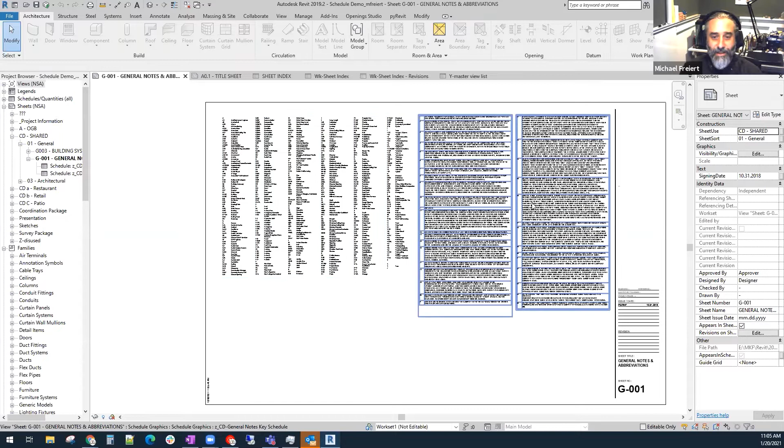There we go. The generic annotations, the notations that appear everywhere, and abbreviations lists. These are both schedules, and we both use them as sort of dummy data. Well, it's static data, but we're using a data set that is not useful to us. Nurse call devices don't really get scheduled a whole lot, so you can hide a lot of data in that set if you don't need nurse call devices.

Donnia, you use is it masses, right? Yes. Do you want to? Yeah, I can show. Do you want to jump into that? Okay. Yeah, let me jump in here and show you.

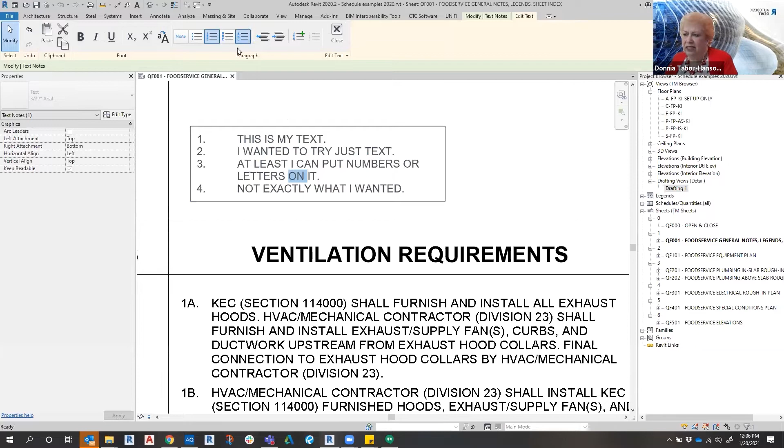This is a whole page of schedules. And why am I doing text? This is a whole page of schedules. And people say, well, you can do text with numbers now. Yeah, so this is my text. I just want to try it in text. At least I can put numbers or letters in, and yes, you can change it out to numbers or letters. I can't do combinations of numbers and letters though.

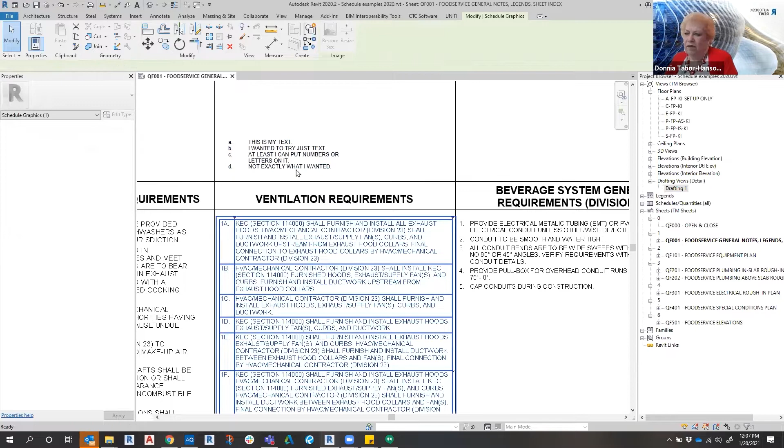So, yeah, I'm using a key schedule. And if I get into this, I can see that I've gone and said the fields are a key name. And just to show you what I've got, my schedules, these are always in a project, so I have these as project parameters. And yes, I'm scheduling masses.

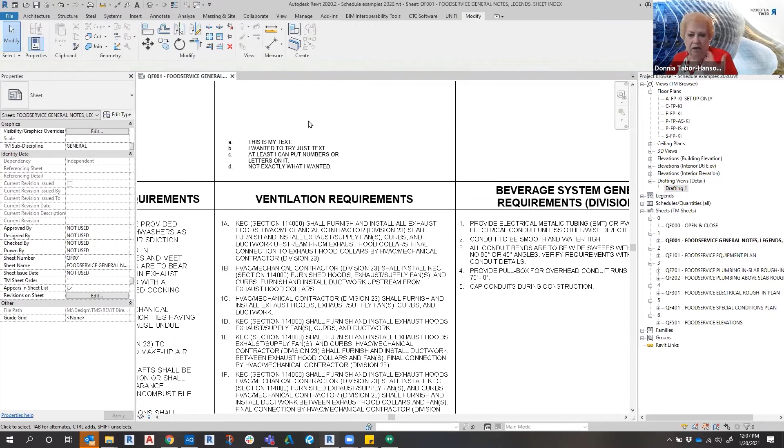It's something, a trick I used to do when, in a previous life, I used to go and set up architectural firms and engineering firms, and I did this for their notes. And then this one has been around since before I started. I was looking after talking with Michael, and I'm like, okay, so I need to see what this is. And I just looked at it and I'm like, well, it's scheduling topography.

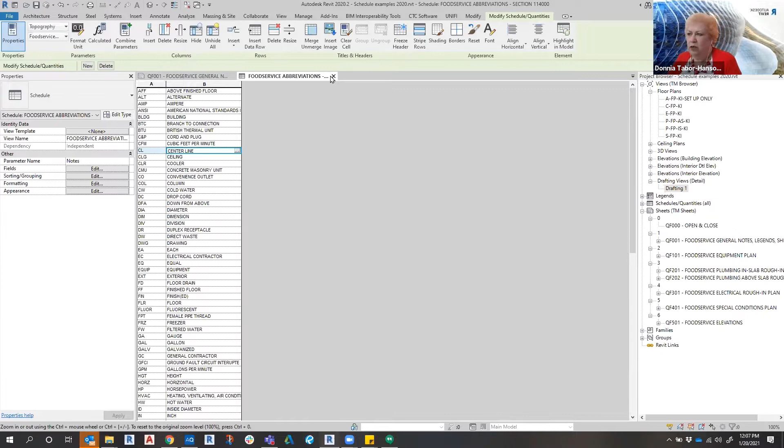Well, I don't use a lot of topography in a kitchen, so why not? So this is why we use these type of schedules instead of using notes and such, because you can break these up, move these around as you need to. And then we also have a nice little generic annotation with the title that we use for just sort of prettying up where our schedules are.

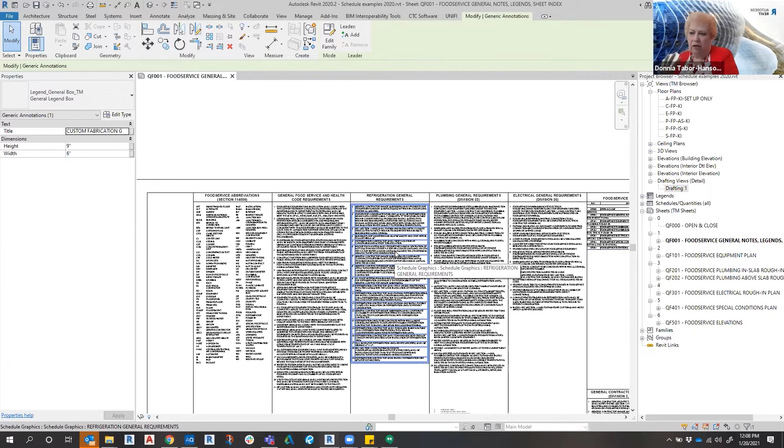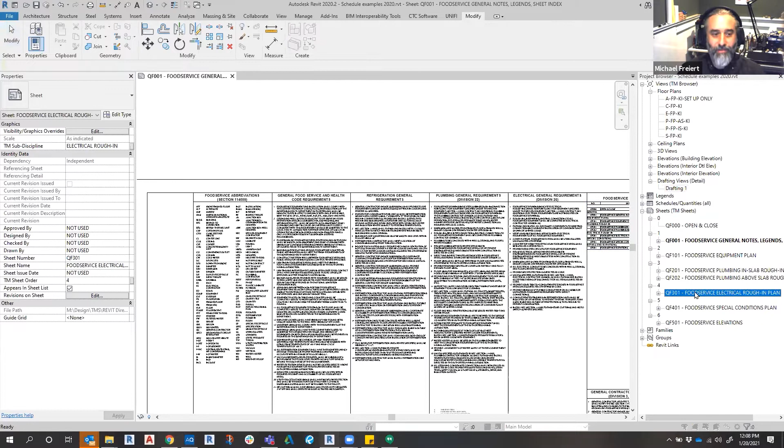So people say that you don't want the big title on there, it didn't look right - do your own title, do a generic annotation. So now these are fixed static things, yes, that once they're set up, they kind of sit there. You might have a couple of changes, once every 2 years you have to revise your abbreviations list. But those are just a vanilla schedule.

Both of us, for our more complicated schedules, have, let's say, print schedules and working schedules. Do you want to jump into your working equipment schedule for a minute? 'Cause that's got some cool stuff there.

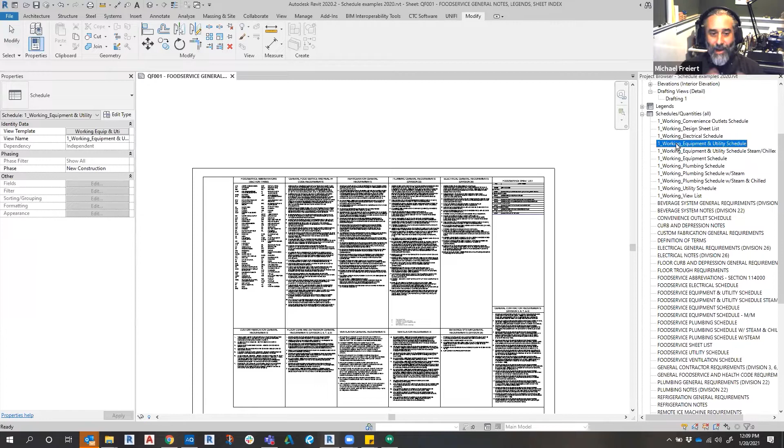Yeah, and go ahead. Your naming there, you use 1_working, whereas we use WK_. So your working schedule sorts to the beginning of your schedule views there, whereas ours sort to the end. It's a different way to organize them, but it means that instead of having all of the print schedules intermixed with food service, blah blah blah, working - if you put a key at the beginning of it or the end, you can sort by letter and pull all those schedules that are working out of the print schedules that you don't want your users to mess with.

Right. And in our working schedules, we have some things that are going to show up here for inclusion, like everything has to have this parameter turned on. And then we have our TM utilities, which is a parameter that we use to help color code, sort, and stuff. I'll be talking a little bit more about the color coding later, but it helps sort things in and out of schedules. This working equipment and utility schedule has everything in it, so anything that's in here feeds into other schedules.

It feeds into our electrical, our plumbing, our just our plain old utility schedule, or our equipment schedule. So they can go in here, and we like it up front because this is where we want you to go. First thing is right up here, go here, and it fixes all the others. And our print schedules are already on our sheet.

So we use these. I also do lowercase here, where if I go to the food service equipment and utility schedule, you see there's no lowercase in here and it's a lot cleaner look. So that's one of the things that we do with that.

So Michael, how do you sort what? As you say, we do the same thing. We have our working views in mixed case or camel case, and our print stuff in all caps. It's a really easy visual cue for the users. It's one thing to have a good naming convention that shuffles stuff around, but if you can have additional reminders to make it clear where the user is, it makes it easier for them. It takes a little bit of learning, but once they've picked that up, they just really run with it.

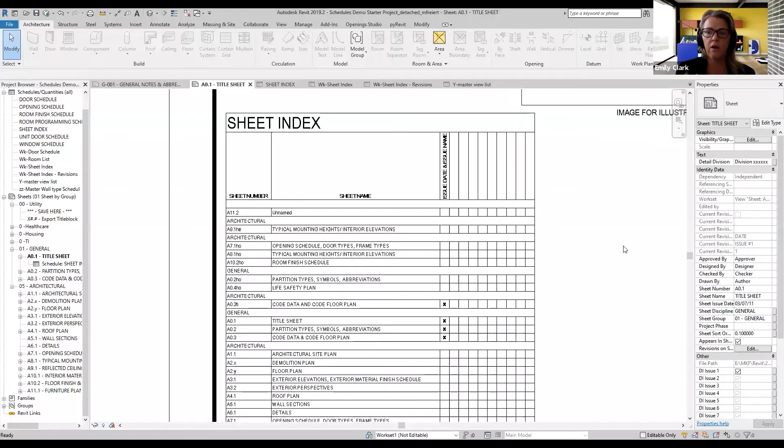So all of these schedules that you already have set up, including the ones that you showed on the cover sheet, those all exist in your standard template. So they're already ready to go for everyone. You're not pulling those from somewhere else. They're there in the template to start with.

So this is the cover sheet that exists in our template. You can see some generic notes there. They're instructions for the user to edit. This is our sheet index. It starts off on the sheet.

Jumping into it, we've got some placeholder sheets that are practice type specific variations. So the HO is for our housing team. They have some different scheduling stuff that they do, different from some of our other teams, related to code specific stuff for them. So that's why you're seeing sort of multiple architectural and general things in this.

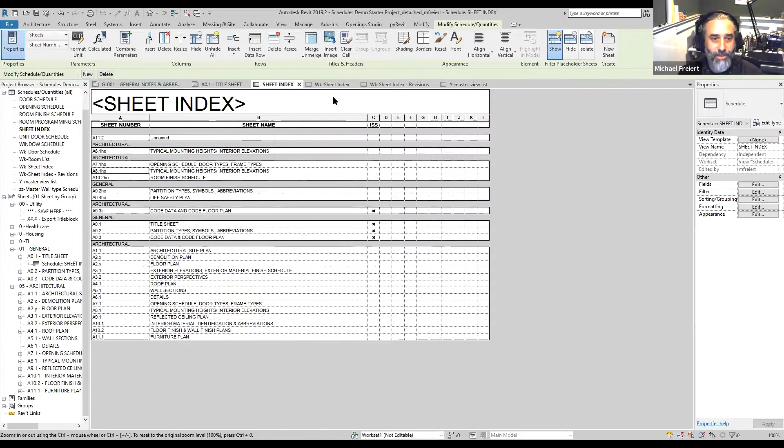But this is for print. There's a lot of hidden formatting that happens in here. Hidden fields, there's a whole passel of parameters in there. The working sheet index has, just like Donnia had, all of that exposed, so that if you need to edit something, you can find it.

Sheet index that's just for managing those little tick boxes of if the revision is included, a sheet is included in a particular issue and revision. So two working views: one that's everything, like this sheet isn't showing up, why not? I can see all the parameters that drive that. And another one that is just the, I need to turn these on so that when an issue is being released, the project manager can go through and be like, yep, all of these are here.

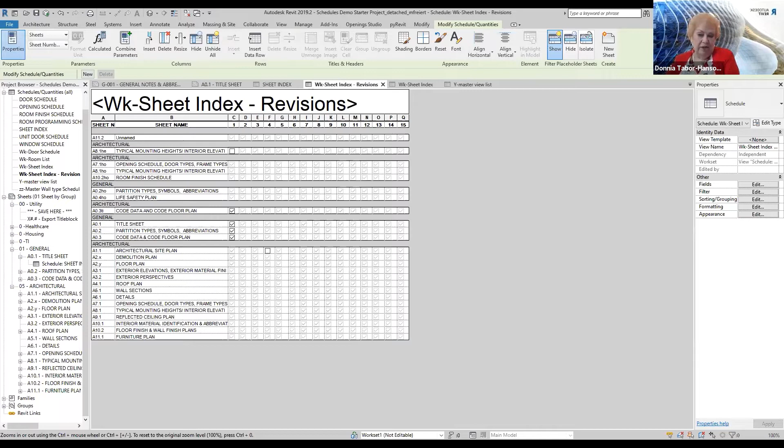So you have a lot of the same information in both your print and your working schedules. It's just in your print, a lot of it can be turned off, but still used for sorting and filtering.

Right. So let's get to the right schedule here. Our sheet group, if you look off on the side here in my browser organization: 01 general, 05 architectural, 03 is civil. It's going to sift in between there. We probably don't have a linked Revit model from civil, but we've probably got some sheets added in there.

So we're going to insert data rows for those dummy sheets. We can then modify the sheet group, which sorts into the bigger organizational sets, the general, the architectural. Architectural here is not the 01 - we've got a redundant sheet index discipline there. So the group sorts it into the big blocks, the discipline sorts it into the sub thing.

So we may want to group mechanical into, say, mechanical and plumbing and break it out. But then we may also have something strange happening. A common issue we have is a mechanical consultant will have, say, M100 be their general mechanical notes for all of their plumbing, fire protection, HVAC. All of those get stuck on one sheet. So M100 may go before M001 and M002, which may come after MP100.

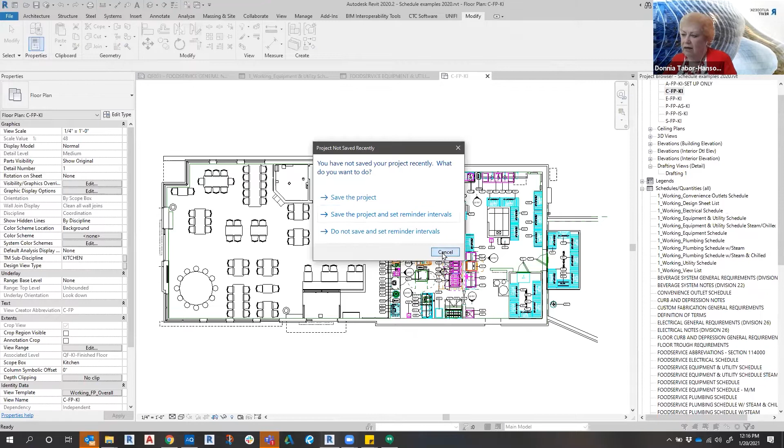Lots of colors here, lots of pretty colors, and all of our colors are based off of our TM utilities. So our TM utilities is a shared parameter used to help us sort things not only in our schedules, but also to make it so that our team members are set up for success. And here is a working view of one of our kitchens.

You see these colors in there. The pink is plumbing, the green is electrical, the cyan is no utilities, and if it's brown, it's got maybe plumbing and electrical, so that's a number 12 or 21. So we use these as 0 for nothing, 1 is plumbing, 2 is electrical, 3 is our HVAC mechanical, having to do with hoods mostly. So if it's got plumbing and electrical, we might have a 12 or 21.

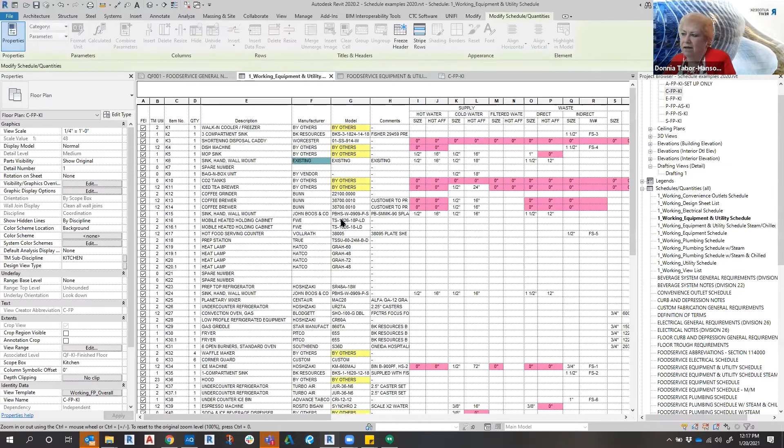And this color coding carries through to our sheets here. The yellow has to do with, is it by others? So you might want to just double check some of your utilities there. Existing, you might want to double check your utilities.

But when it comes to our families, if it's pink, there's something missing here or something red flagged. So do you really have a 0 in your direct waste size? Well, maybe it doesn't have direct waste. Maybe that parameter just needs to be pulled out of that family.

A lot of times when they build families, they'll start with a generic model family or specialty equipment family, and it'll have all these parameters in there. Well, they don't think about removing the ones they don't need, they just fill out the ones. Okay, I do the same thing, I fill out the ones I needed. I'm trying to start learning to take these out.

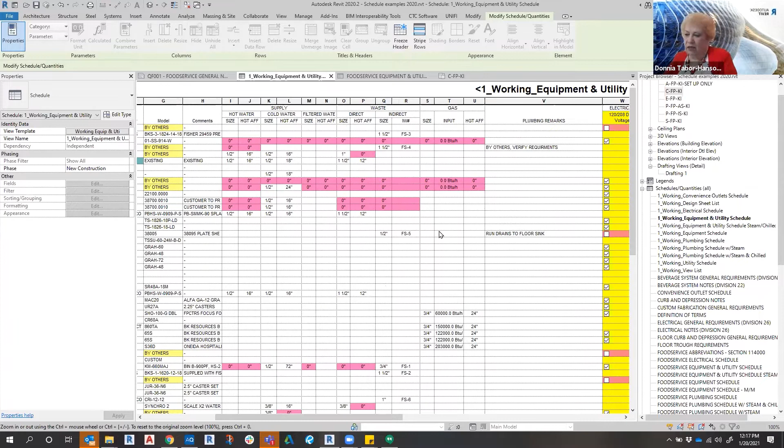But this also is good for down here. I know I've got an indirect waste size, but I don't have an indirect waste number. So this color coding is just a way of helping our team members check their schedules and their working schedules.

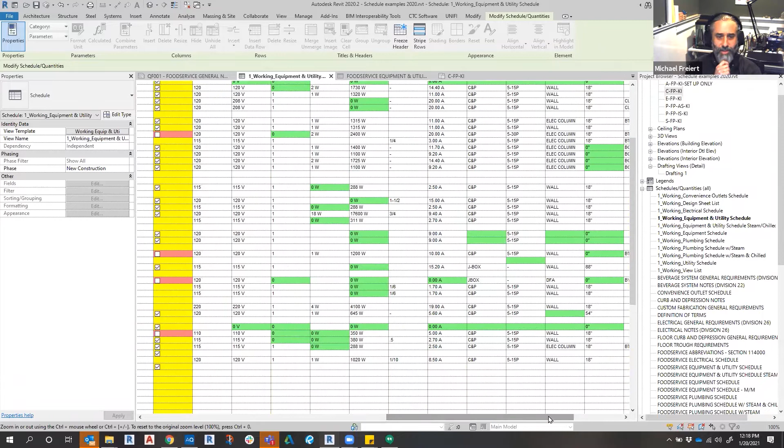And those are all conditional formats, right, Donnia? Yes, yes. So when I go in here and look at these schedules, I have actually started using some working view or view templates on my schedules so that I can set things back if I need to. And it was easy to take one from the other, because if I took the utility one, I could go in and delete all the plumbing and now I've got an electrical one, or go and delete the electrical and now I've got a plumbing one. So I just started using that recently.

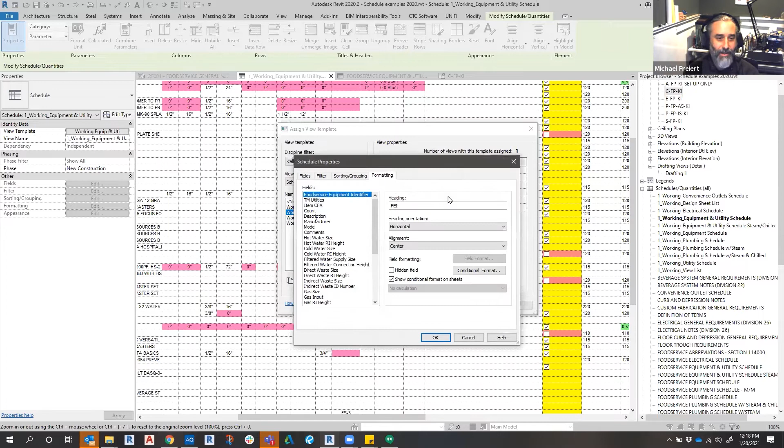So when I go into the formatting, if I go to see the indirect waste size, I have a conditional formatting that if indirect waste size equals 0, color it pink. So it's just a conditional formatting for those. And we're going to get to this a little bit later, but I want to point out that that's in the schedule for the parameter, and that'll matter in a little bit. That the conditional format to change the color is there.

Yes, and it is in my working views, not in working schedules, not in my print. So we just put the color in here, and it's just a way to help bring the team member's eye to, here's a problem here. Is this really supposed to be a 0?

Like, I found a CO2 tank that had all these parameters in it, and I'm like, it doesn't have utilities. So I just deleted all those, and guess what? It went all blank across through there. But it is just a way of checking up on things.

Let's see, I'm going back to my notes.

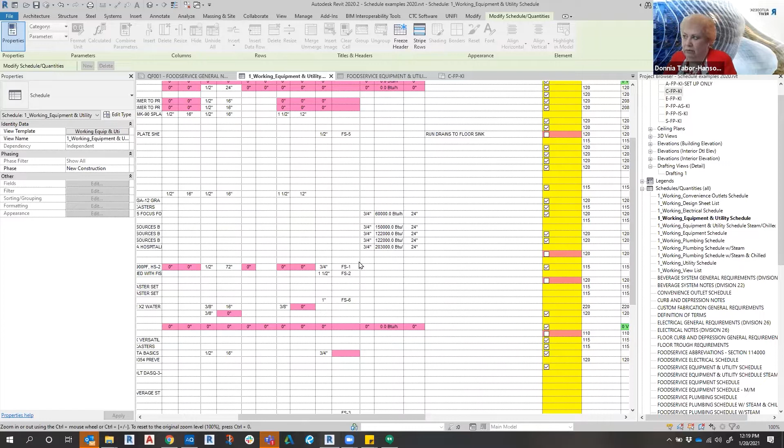The project parameters, we remove the 0s. So if I go to my food service, I don't want to see all these 0s, because that will give us an RFI real quick going, 'what do you mean you've got a 0 on your filtered water size?' 'Well, it doesn't have filtered water.' 'Well, then why do you have a 0 in there?' So that is moved in the fields.

This took some double-timing work, because here I have hot water size. If I go to formatting in here and find hot water size, it's a hidden field, because I'm using HW size. Now I'll go back over to the fields and find HW size, and HW, quit, cancel.

HW size, if I edit this parameter, you will see it's just got a formula to it. It says if hot water size equals 0, use empty length, else use hot water. That's what the formula is reading. So if hot water is a 0, use empty length.

Oh, where's empty length? You want to know? I hear that. Yes, way down here. I have several empty parameters. These empty parameters, I don't have a text one because I'm not working with text. I'm using length, and that works for the size of a hot water size. It also works for the height of the rough-in. So I can reuse that parameter over and over.

These parameters, when I edit it, you can see it's a project parameter. The project parameter is used here because I don't have to add it to my shared parameter file. I don't worry about that. It's in the project, and guess what? It's only used in schedules. Guess what? The schedules are in the project. So everything is maintained right inside there.

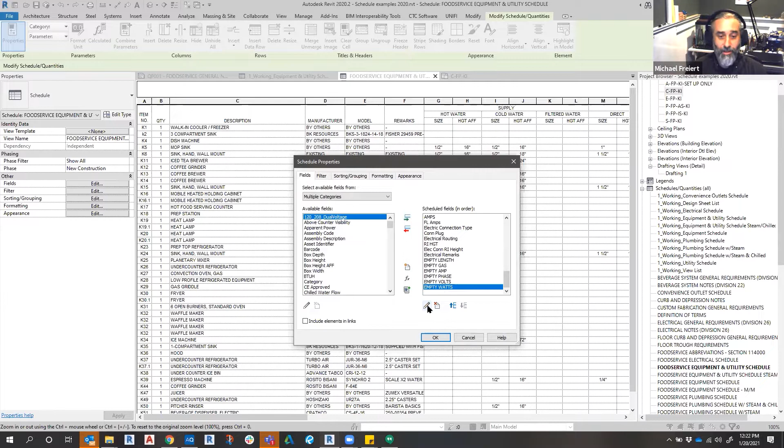You could have, if you need - yes, a light fixture that has an empty length for some reason or other, you could have that assigned to it, or a nurse call device or topography, or something in your door, as long as it's a length, as long as it's inches, feet and inches, yeah, you can use that.

When it came to something specialty like the electrical, I actually had to go see what it was - wattage, discipline is electrical, and the type of parameter was wattage. I had to go apples to apples with that. So I went into the ones that needed it for the watts, the volts, and the amps, and put those in there.

So let's go back to the fields and find wattage. I've got watts, and then I've got my WATTS in capital letters. Notice the capitalization - anything that's all capitals is something I've put in there. And I can see that this is: if watts equals 0, then empty watts, else watts times - because we're putting kilowatts apparently in here.

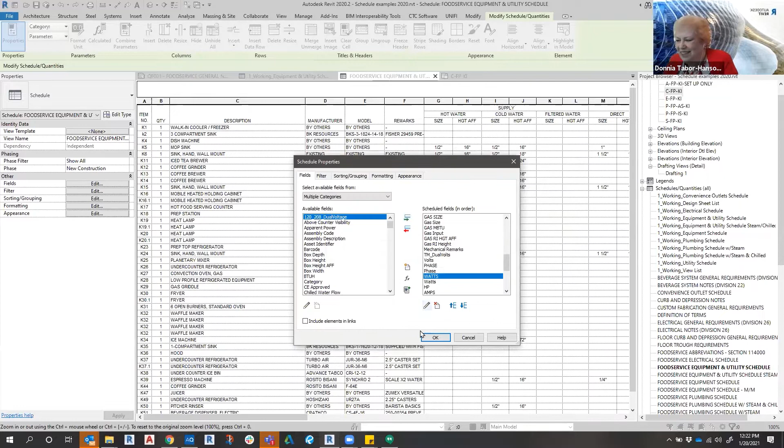Using those formulas and using those project parameters, I'm able to clean up this. This does look a lot neater than this right here. There's a lot going on here and a lot of things that we don't need.

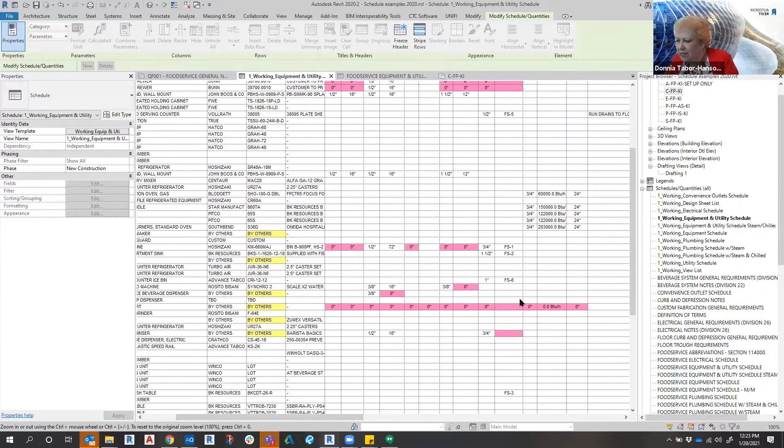As soon as I get - if this was FS3, let me get back into it. FS, well, let's just pick it on, there it is. See, the color goes away. As soon as it gets a correct value, it clears up the color.

That's how setting them up for success and giving them these colors so that they can work with it, so that it's a flashing thing. And it relates to the same colors that they're used to seeing in their print views. That makes it so they're used to it all together.

Then when they're ready to print, we have it just to go in here. And if I'm in FP overall, I go to FP overall and print, and just assign that print template to the project.

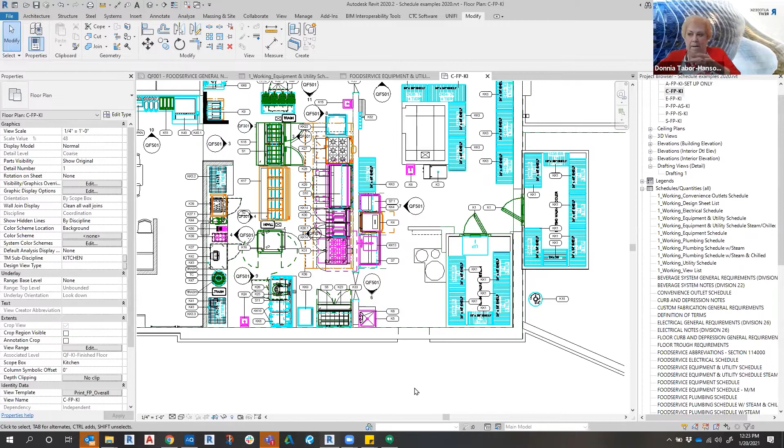So that's one way we're doing a lot of conditional statements and some formatting to work with our schedules. These things can be done in a lot of ways. You can red flag anything with a color, just put a conditional color statement in there for it. That's something I'm just introducing to our schedules.

I've got one person I've been working on the chain restaurant schedule with. She's really excited. For the others, if they want it and they see BIM managers come out with a new schedule, go delete the old one out of your project, start a new project with a new template, insert from file, and you can bring those schedules into your project. So everybody in my department can have all these color codings in any project they're working on currently. I've got it in 18, 19, 20.

That's the problem with BIM managers nowadays. You've got to keep up, because we don't get to choose which version of Revit. That's your job, Michael, the architects. We don't always get to choose right now. I've got a couple projects that are in the wrong version because they came with an existing file. We're the last ones invited to the dance, the kitchen. So we have to be prepared to deliver in whatever project version you have.

We've actually got a very similar use of the conditional project there, or yes, conditional parameters. Let's see here.

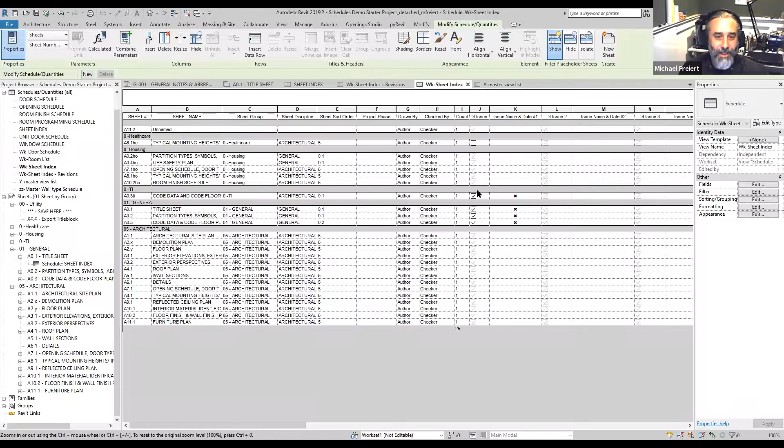I mentioned the tick boxes for this sheet issued with a sheet name, the issue name and number and date. There's a conditional format that comes from checking if this parameter is checked or is yes, it displays an X, a weird textual character, not an ASCII code but something like that. And if it's not checked, the parameter displays a space. So these are showing a null value effectively by a space, and they're showing an X.

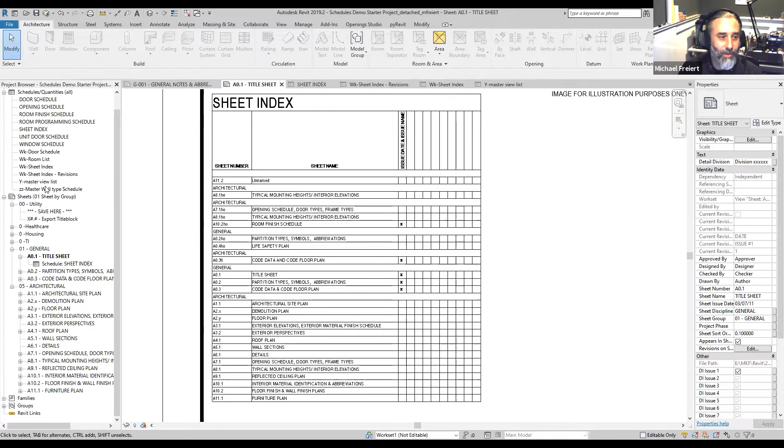So on the sheet index we're seeing those little tick marks, and we're not really running with them. We use a little bit of conditional formatting for color in our master view list. This is when you're looking for a view and trying to figure out if everything's there. Sheet number shows up as green. If it's not on a sheet, it doesn't show up. It's a way to really clearly highlight that there's something missing there.

Now, something I'm interested in digging into more, based on your use of conditional formatting and the way we both use a dummy parameter to drive data cleanup and make it show up the way we want, is shared parameters, which we use a lot more aggressively than you do. Hijack shared parameters to schedule something interesting that you don't necessarily expect to need to schedule. Do you want to talk about that a little bit?

This is a really cool idea that I'm starting to torment our BIM team with. You are? Okay, you'll have to stop sharing for me to share. Yep. We practice this on Teams, and on Teams you can just steal sharing from each other, but on Zoom in presenter mode you have to actually give it up.

Okay, my hijack parameters. This all started when I was working. There was another BIM manager in charge of the Trimark shared parameters, and I was working with a client that had a lot of unique requirements for schedules. I was told, you don't touch the shared parameter from Trimark, and that's still hopefully the rule today. So I told her one time, how about if you give me some I can hijack? Just some parameters. She says, what do you need? Well, I need some text parameters and some length parameters. And I gave her a list.

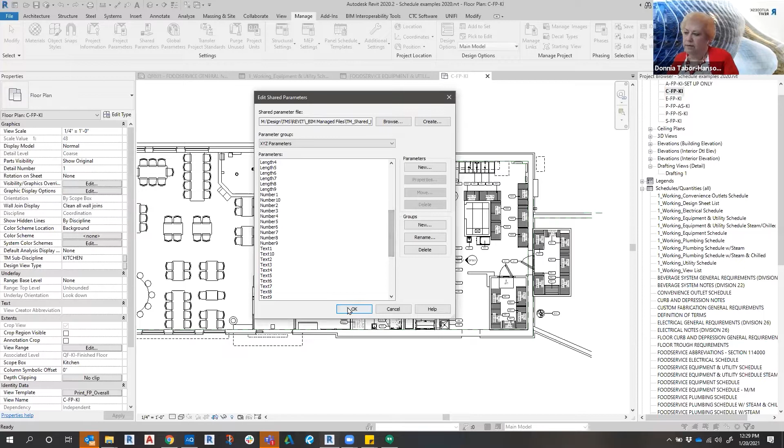Now, you want to really mess with somebody's mind, don't tell them what it is. So what you're doing is taking other data and linking it to that shared parameter, and then displaying it in a different format with a different thing. All I had to do is give it a different header, a different title in the formatting, but it allowed me to use those.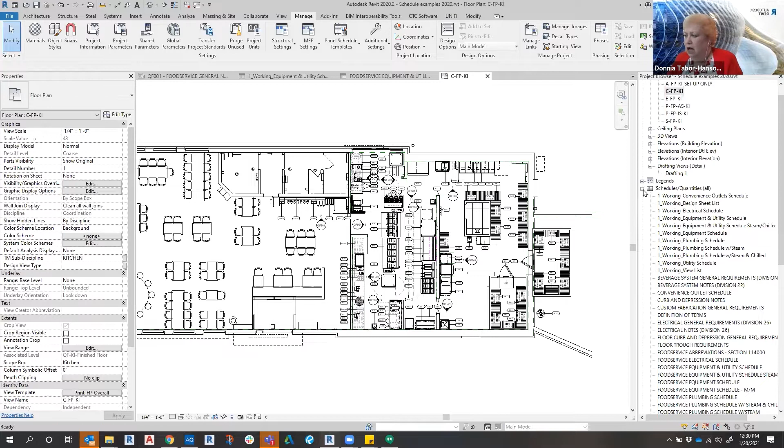And the worst thing you do is don't tell everybody what you're doing. So, never document anything you do that is different from standards. If you're doing something different from standards, always hide it, name it exactly the same thing, don't rename anything. I'm kidding. Please, if you change something, if you change normal behavior, write it down, because you will forget, even if it's just you, when you look at the project 3 months from now.

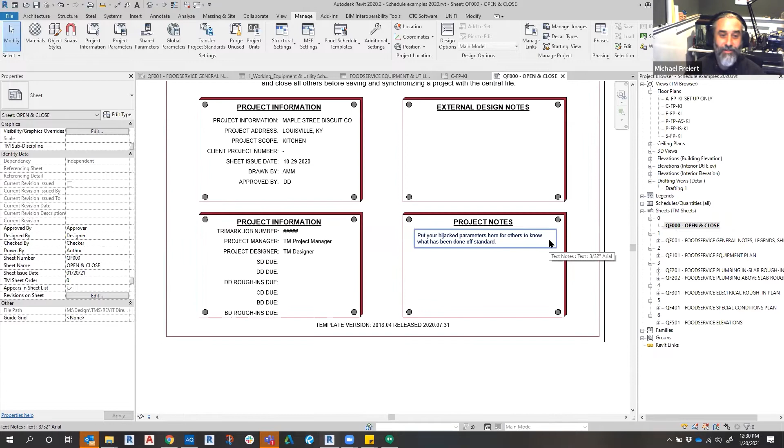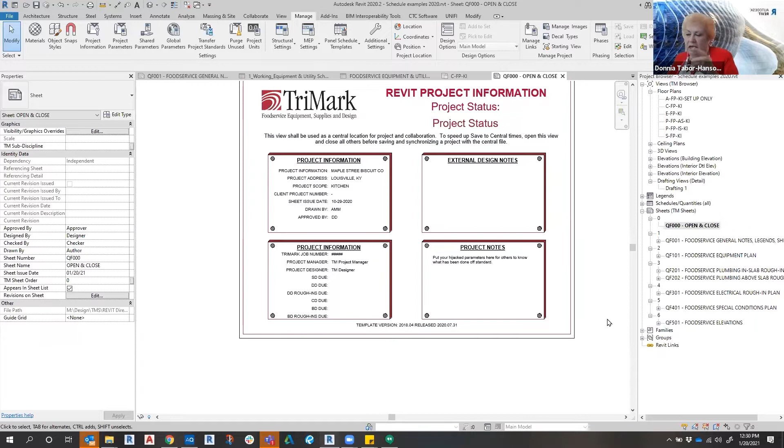In the case where I was working with a large team, we actually had a OneNote with a whole list of where all the hijacked parameters were. Right now, when I'm working on something, like for this chain restaurant that I'm putting on, there's going to be some things that are unique, not only maybe hijack parameters, but also other things like make sure that you check this and that, or get this information for the project notes.

We have a place on our landing page, this is what our open and close page is, it is a title block, and this is where we put our project notes. So you would put your project hijack parameters here, so that others know what has been done that's not standardized.

So yeah, you do want to document if you do these hijack parameters. It's kind of like this: as a BIM manager, I know that I can give you a shared parameter file and somebody's going to break it. It's like I've invited you into the sandbox, you're going to break my toys. Some people will throw the sand out and then invite the cats in. It's just, if you give them the toys they can play with, they're more apt to not break it and not try to create their own.

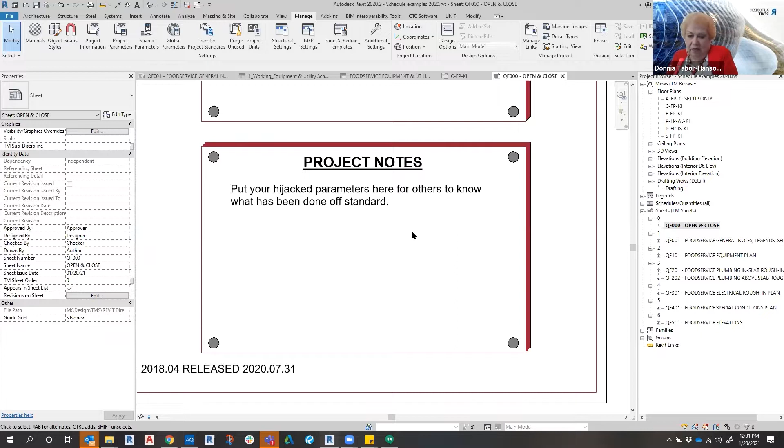They need some of their own. I understand, well, here's something to play with. And those toys need to be accessible and easy enough for them to understand. So naming the shared parameters something that is useful, as opposed to just...

I recently came across a line type that was such and such a line type, and I'm like, I know who that's named for, I know the person. I'm sure they didn't do it themselves, I'm sure they said, hey, I need this line type, and some user is like, okay fine, I'm putting in their line type. But if you're going to give people those tools, which you need to, give them tools that are easy to use.

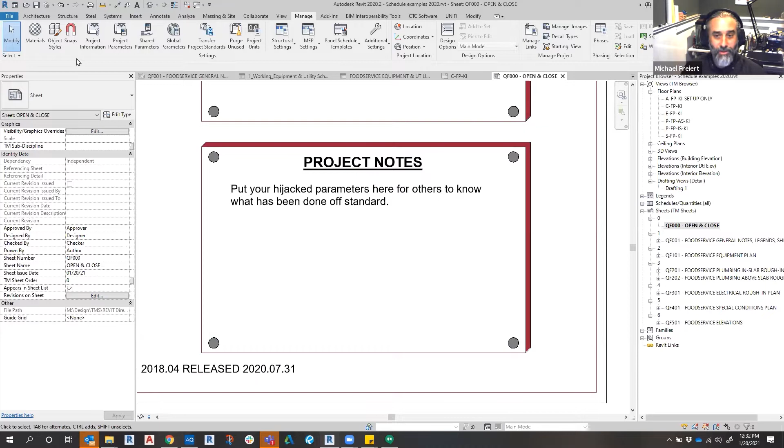So the working views that we're demoing are all set up so that they work well for what the users are doing. Like what I, as a BIM manager, want to be the ideal behavior may not be what actually works well for the boots on the ground. So give them the tools that work well for them, and room to grow in those tools.

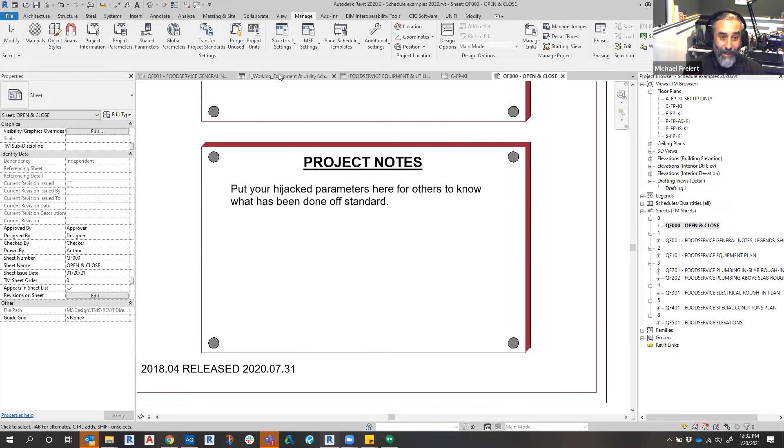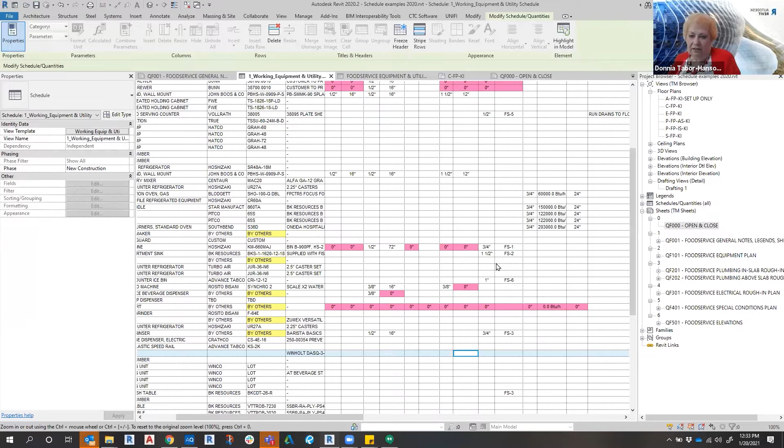Right now I don't have any of those hijack parameters being used in the current things. Now the group that I have been working with for that larger chain, as far as I know, they're still using some of those hijack parameters, but I know others that have used them, and I just know it's there if they need it. Give them the tools, they're going to be smart enough to go get a shared parameter.

You know, give them the ones that they need. Well, and you can use those to potentially combine multiple parameters.

So if you've got 2 or 3 different parameters looking at different things, and you don't want to edit the families and rework those parameters, you can have a conditional statement, like: fix parameter C, if parameter A exists, use parameter A's value. If parameter A doesn't exist, use parameter B's value. If parameter A and B don't exist, return some error code and highlight it in red, so you can see what's happening. As long as they're the same flavor of parameter, you can get things dialed in.

And even if they're close, you can do something like multiplying an integer by 1 inch to get to a length, if you have to.

Yeah, let's see, we've gotten a little bit off our script here.

You had mentioned using view templates for views. Yes, and switching a little bit between different types of working parameters, or working schedules there. We really only use view templating in schedules for resetting things to desired print behavior.

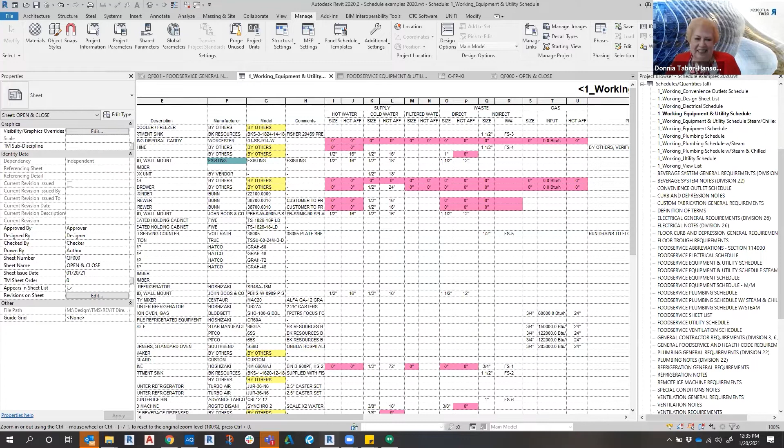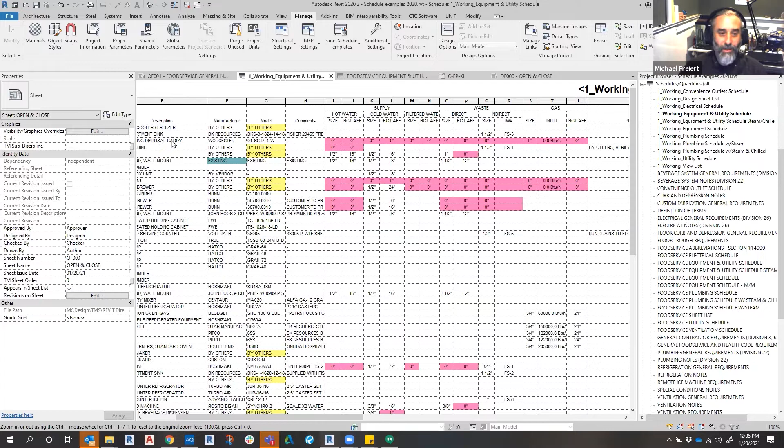Everybody has this, where someone copies something from a previous project. It worked well there, so they copy it over. But that project was based off a project started 5 years ago when we used such and such a font, and all those little display things are just a little bit different. Maybe it's a 5/64 font size instead of an 1/8 inch or whatever. So you just reapply the working view or the print view base schedule template, and you can get there.

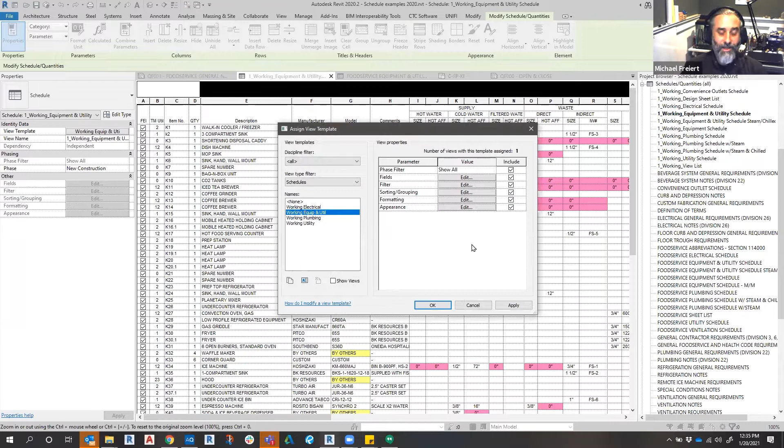And you can decide what you want to include. If you don't want to include all the formatting... actually, never mind, you should always include all the formatting. Yeah, you should. Let's just not do that.

One of the nice things about this is if you fill it out in here, you can go to view templates, manage view templates, and see these things show up. So I can use transfer project standards to get my view templates from one project to another. I don't have to bring the schedule over, I can just bring the view template over, and apply it as needed.

So if I go back and try this idea, I need that formatting for the print ones because I hadn't thought about doing this before. I just started using it because here's all the things that were in there, it had all the categories and everything formatted the way I needed it to be. I just duplicated it and made, remove plumbing, added electrical and stuff. So I like the idea of having it lock down all your formatting, your lines, your types of font, and everything with it.

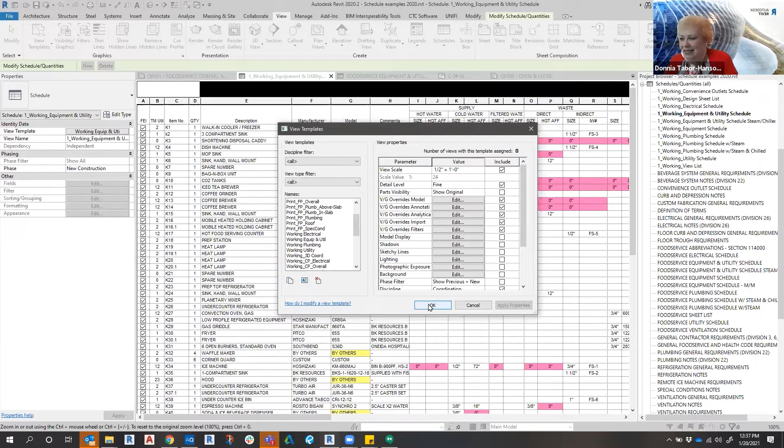And that would be so easy to bring over, because you can just do that with transfer project standards. Nice, yeah. And worst case, if you've only got part of it that's messed up and part that's regular, with the template you can apply just the little bit of it you want. I believe that works with view templates too.

Oh no, come back, do you need me to stop sharing? No, it's fine. So let's see, where are we at here? Speaking of view templates, if you do want to stop sharing for a second here, let me get back to Zoom and share screen, Revit share.

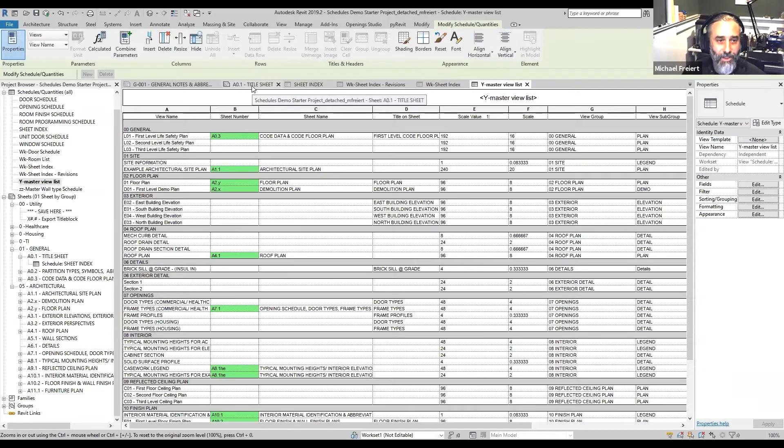So if you've got one schedule, that's great, we all know hopefully that you can split a schedule up into multiple columns, which is how these general notes work. There's a whole passel of different columns there.

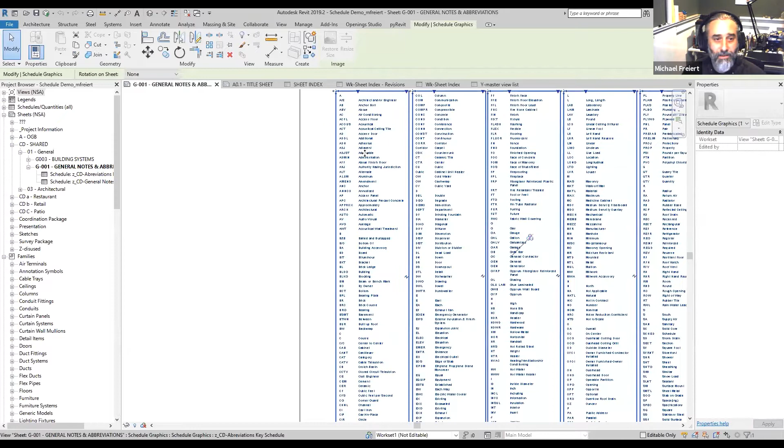And these are using a similar hidden field formatting. Abbreviation letter there is a hidden field, so the sort process sorts the A's out and they're called A, and that's what the group is. So if I make that hidden, the sorting and grouping is using abbreviation letter as a header.

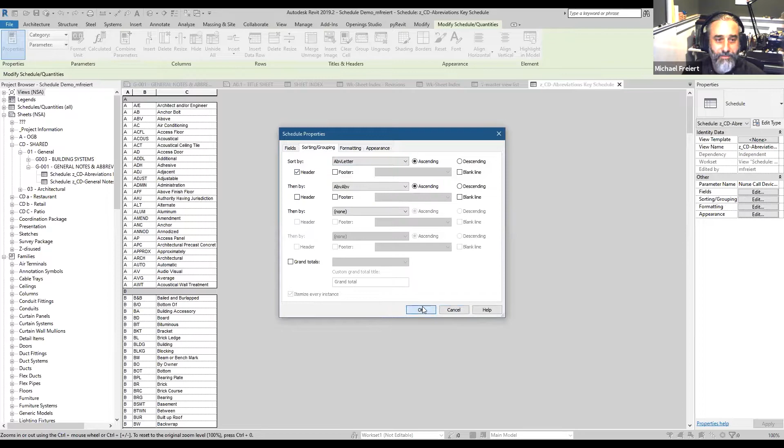On our title, though, let's say you've got a really big project. It's not at all unusual for us to have a really large project that has more sheets than will fit on one page. The way to fight that is to take your sheet index, or whatever schedule you have, and duplicate it.

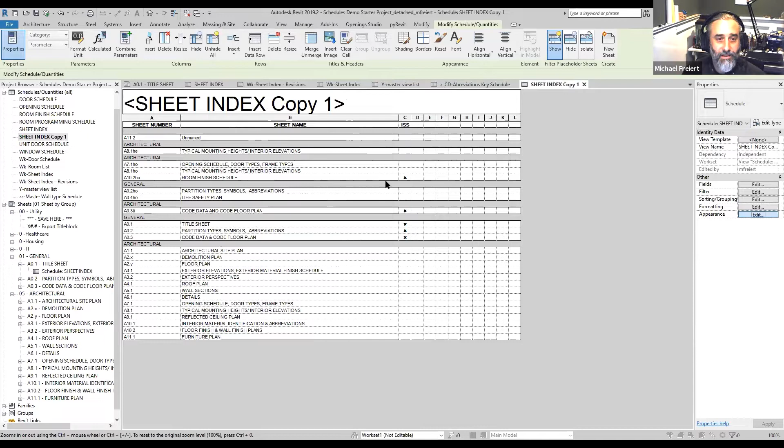In our working sheet index, we don't need to change anything, we can just run where it is, keep going. But in our sheet index copy 1, we're going to turn off the title because we don't necessarily need it on the second page, we don't want to see that.

In this view, we may want to filter it by greater than, and then for schedule A, and for page 2, we may want to filter it, for schedule A, we want to filter by less than some value. So this would be where our sheet sort order comes in.

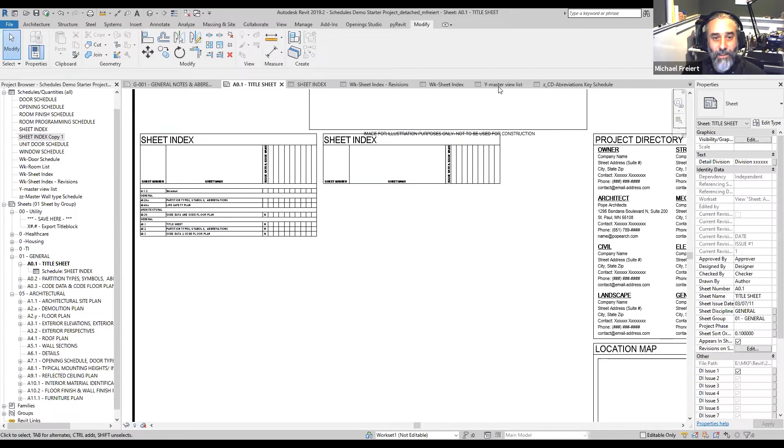We don't want parameter exists, we want to say is less than, I'm just going to pick 5 here. And that's going to lose all of our architectural numbered sheets in our, it's going to be called copy. We're still seeing all of them.

So over here, we want to filter by sheet sort order is greater than or equal to 5. That way, anything that is 5 is included in one side or the other. So if it's less than 5, it goes into the first sheet. If it's more than 5, it goes in the other.

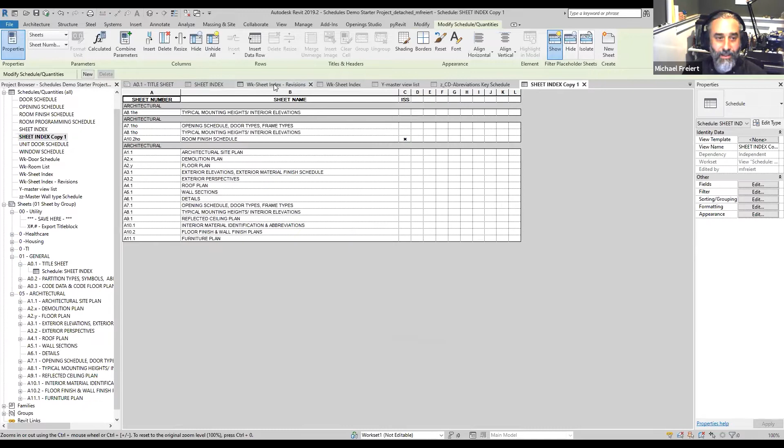The reason we've got that, no, not the revision 1, the working sheet index, the reason we've got that as a number rather than an integer is if we need to add, this wants to be 4.9, or this one needs to be 5.1 to move it to the end. Then when we have a 5.2, we can add 5.12, 5.13. We can add a little tiny bit of random number there.

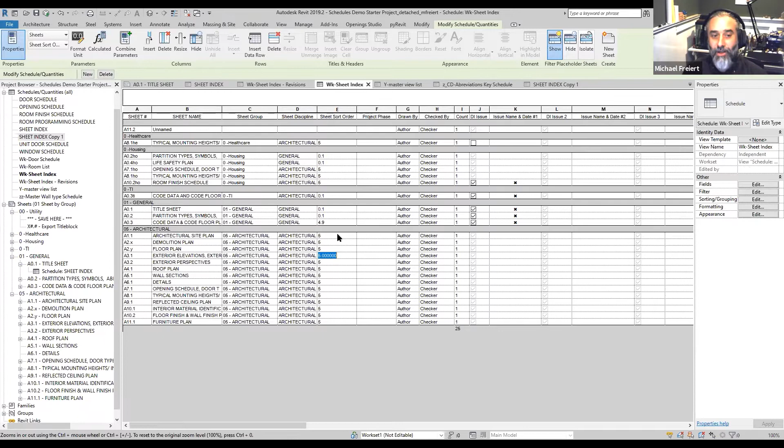It doesn't show up anywhere other than in the sort order schedule to get it to show up in the right order. If that was an integer and I needed to renumber this to 3 and then added 2 more sheets to 4 and 5, well, now I'm in my 5s and that doesn't work. So I find it's very rare that you want a hidden parameter to be an integer as opposed to a number, because a number can always be a whole number.

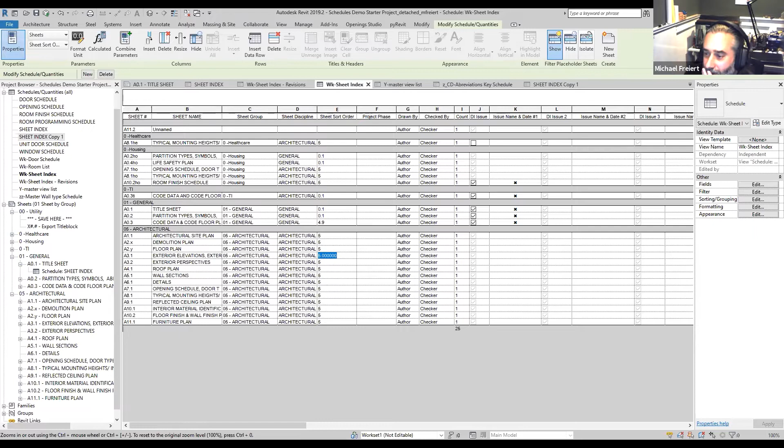But it's rare that it needs to get a little bit more tidy. Let's see. Okay, I've got something to show there. Let me go back to mine. Yep.

When it comes to those, that's when my TM utilities helps. So I've been in the overall working equipment and utility, but when I go to my electrical schedule, so every one of the, go ahead. I was going to say, to talking about your TM utilities thing,

These are another hidden parameter. Donnia is using them for the 0123 as a code for electrical, plumbing, etc. Yes, and they could be ABC, MEP. Yes.

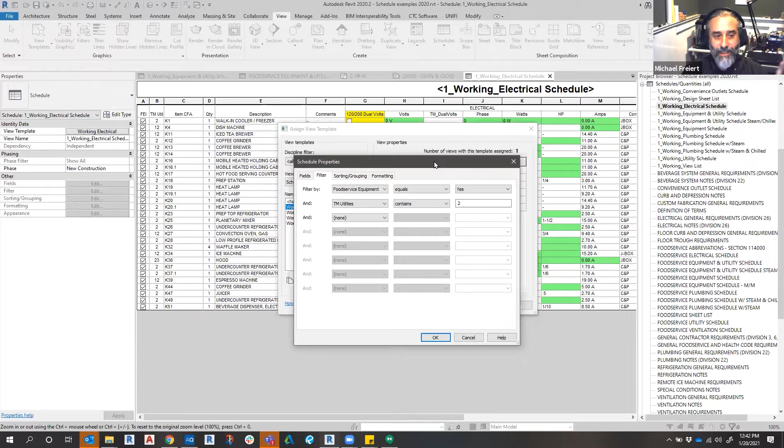But by using them as text, you can get a whole lot of data hidden in there to use to filter in a lot of really aggressive ways, because you didn't mention what the TM utilities parameter was earlier. We've been skipping around in our script here, so I'm trying to track things. I don't think you mentioned that one.

Yeah, the TM utilities is a text, and we have it where if it contains 2, it's going to be electrical. So it could be here, I've got one that's 23, I've got one that's 12. It could be 32 or 21 just as well, as long as it contains 2. So we use that contains to get in there.

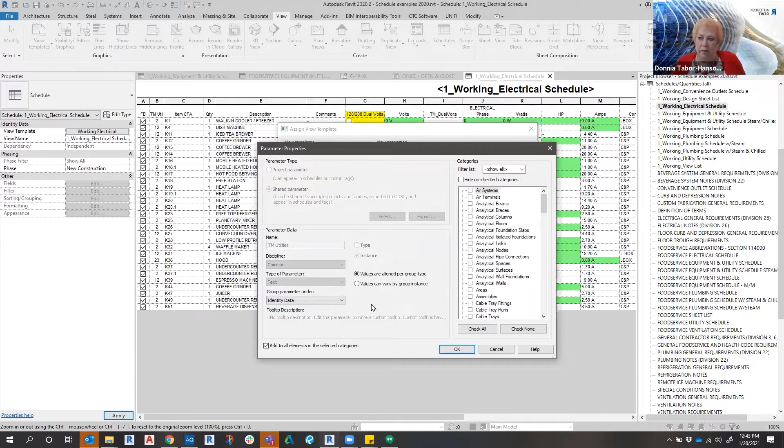And if I come over here, since I'm using a template here, my TM utilities, he has text, and I generally put him under identity data. So if I get a family from somewhere else, goodness knows, my people don't always take families from our Hive library, they may get them from anywhere but Revit City, please, sorry. But we have to put that TM utilities parameter on it.

So I've even developed, it's a whole different story, but I've got a dynamo that they can run that just adds the TM utilities to it. And then they just have to fill out the value, because they need to put that and a couple others, like making sure that the food service equipment identifier does come on a lot of families that are developed by other people as well, or found in other places.

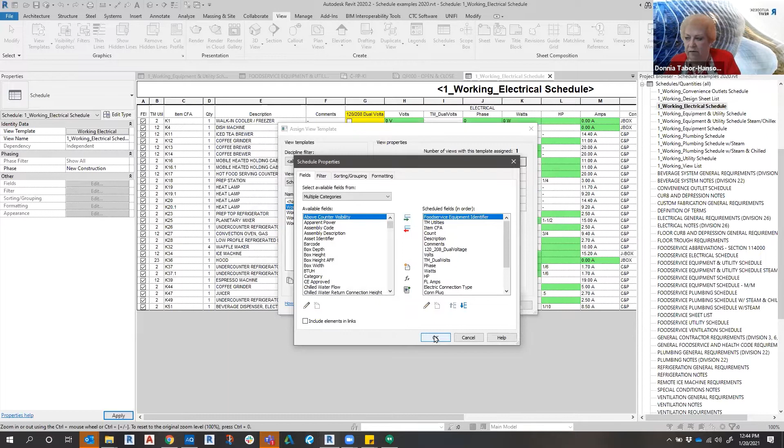We have a couple parameters that we do have to add to families that come from outside of our company, but I'm trying to keep the library growing weekly. That helps, but those parameters are hidden in the print schedule, yet they're still used for filtering and sorting.

We've really focused on the sheet index and this working schedule, because we're doing a lot more complex things in those two particular schedules. You can use all of these tricks for anything you schedule.

Our housing project doors get scheduled as unit specific doors in addition to our overall project doors, so we've got a couple of door schedules sorted in different ways. We've got our master view list, and a master wall type schedule that lets us look through which wall types are actually present in the project, which is a quick, easy cross check.

We're starting to add a couple of schedules - I'm in the middle of a big template rebuild, and we're adding in some quality assurance and second set of eyes views and schedules. So that second set of eyes can see, hey, this data appears prototypical, you should double check that it didn't need to get edited.

We don't quite have all the quirks worked out of that yet, and most of those quirks are how QA wants to see that data and what makes it most accessible and usable to them. So just having the ability to schedule something doesn't necessarily give it use to the end user. Finding out what the person actually wants to do with that data and how it's useful for them is really key.

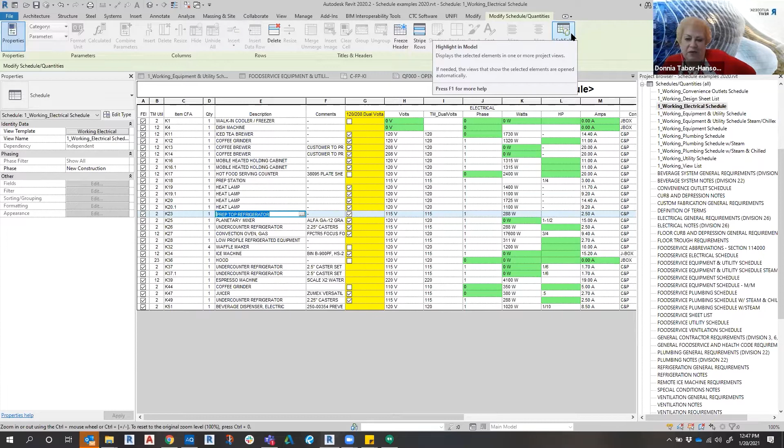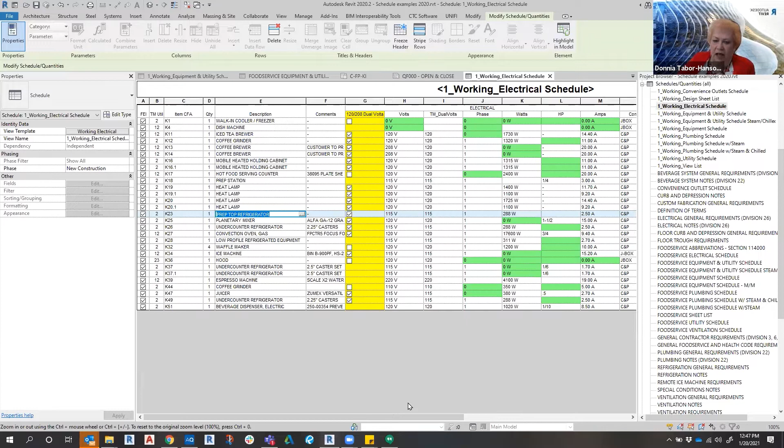When you can go through and schedule everything - if it's in a work set, a phase, or whatever - that's some of the key ways people can hide things from themselves. Maybe people know that there's 60 something ways to hide things in Revit. I think my list is up into the 70s now. I took the original 30 list and went through another and combined another, and I think I'm at 70, and that's including the normal ways.

All right, so let's see, we've talked about - I'm not going through our list because we've bounced all over here. Well, that's what we've done every time we've gone through this. But why don't I just go back?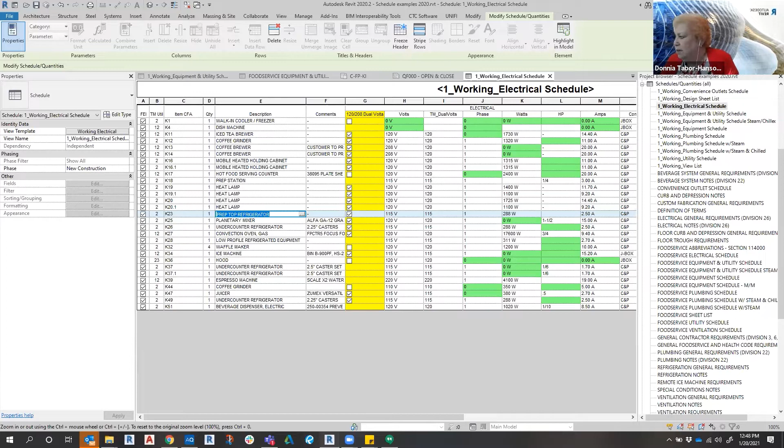I was going to say one more thing on working schedule versus print schedules. Usually all of the data is there, just a lot of it's hidden in the print schedule. The reason for a working schedule is so that the data you need is accessible to figure out why the print schedule doesn't look right.

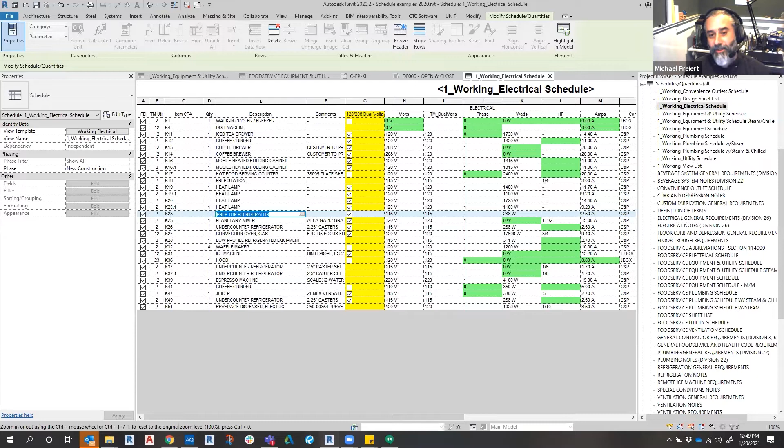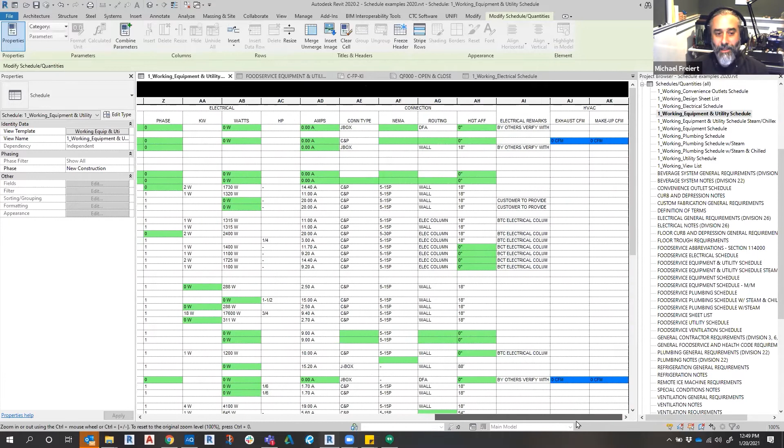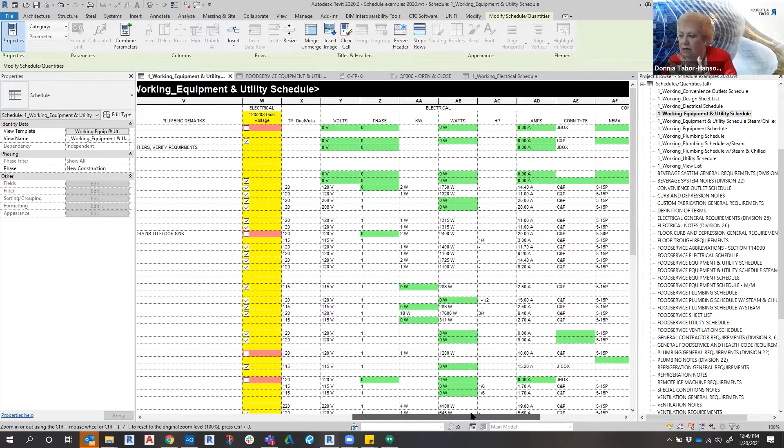Rather than have to turn it off and on and have someone try and figure out exactly which parameter might be wonky, having a working schedule means you can just jump in and take a look, you can see it. And the work schedule is where you should go to edit anything - if you want to edit a parameter or something, maybe add that filtered waste number and stuff.

Or, I mean, I'm sorry, the indirect waste number - this is where you should go and edit it. This is where you should go. It's called working because this is where you can work in it. The print one, that's not your sandbox - go back over here, so to speak.

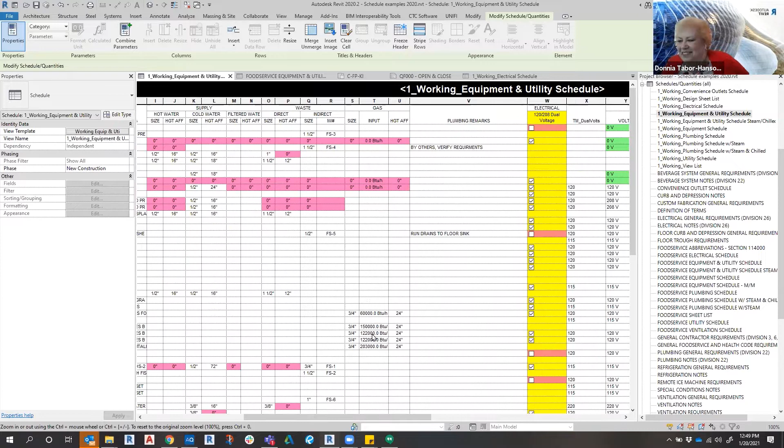So yeah, they're made for you to be able to work in them, to assist you in finding things. And they're going to have more information than you do in the print most times.

All right, I'm coming up on 10 minutes left.

So we've talked about conditional formatting, using that to drive colors and style formatting in the schedule proper. We've talked about using conditional formatting in a cleanup parameter. We've talked about where we want to use project parameters versus shared parameters. Generally, if it's going to involve a linked file, it's a shared parameter. If it's going to be something internal to your project, it's a project parameter. That doesn't mean it can't happen across projects in your firm, but if it's in your project.

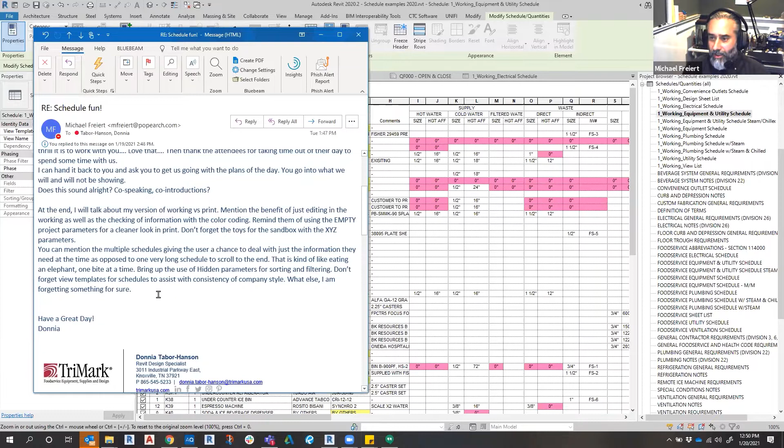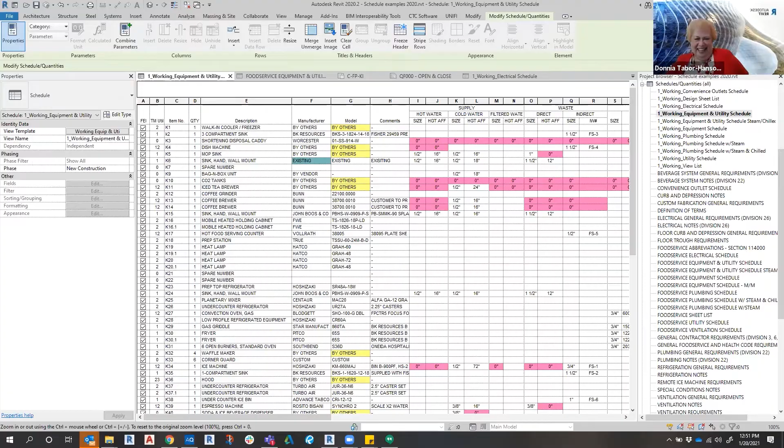Let's see, I just brought my notes over here on the screen. Yeah, I'm still sharing. Oh, did you want to see my notes? No, I've been highlighting my notes, and I highlighted them all for the things we've done, in a color I couldn't read through, so it makes it harder to see here. These are the ones that we want to go back through.

Emily, do we have any questions? Yeah, there's one following question. I just wanted to make sure that you covered everything that you wanted to cover.

I really wanted to say that I think it's very valuable to use conditional formatting for QA/QC. That's something that not only applies to schedules - at my previous firm, we would even use conditional formatting and coloring to check plan views as well. I know that's not related to schedules, but really leveraging the conditional formatting to check to see if fire rated doors are in fire rated walls, if they were highlighted a certain color, like you used to do with a highlighter by hand. So there's a lot that you can do, and I learned something today as well. I really like what you're doing with the scheduling.

And then the one question that was in the Q&A, there's a couple of them. Could you please talk more about sheet revision schedules? Is it something you can turn on and off from the schedule, or is it through adding clouds to each sheet?

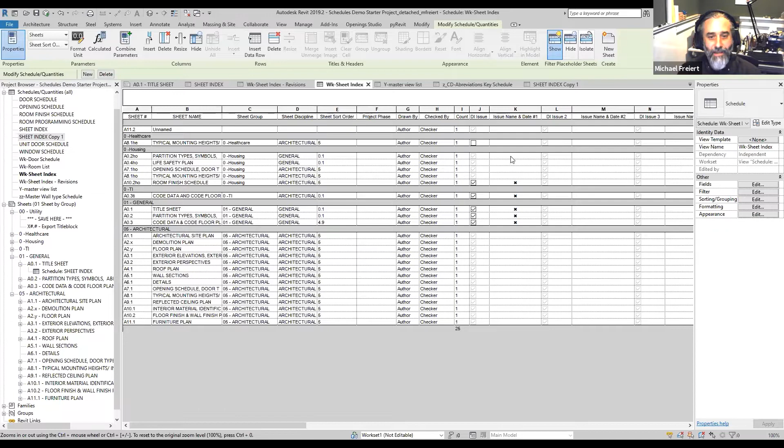So that, yes, that is currently a dummy parameter. This DI Issue thing is something that needs to get checked per sheet, and then it will turn on that dot. What we are in the process of implementing, and that involved some - we're consolidating our model practice across the firm. We've had a couple of different templates that were getting more and more divergent and had some data sharing problems internally. And in cleaning that up, we realized that this was not happening consistently.

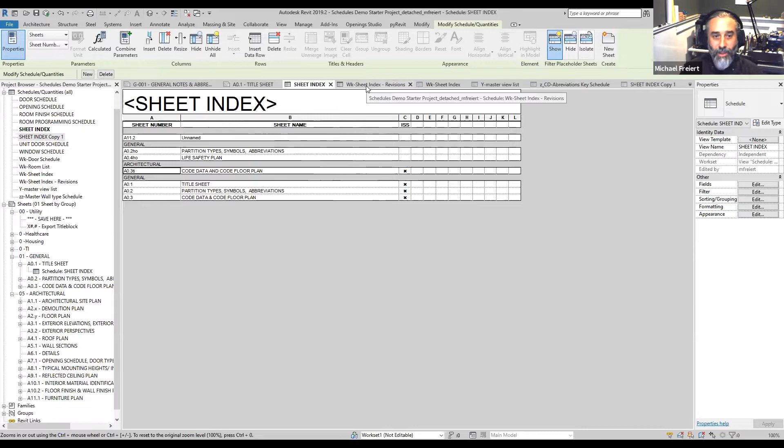So what we're looking at doing is taking this data, exporting it out of Revit into Excel, into a stock template that will effectively just look at the scheduled real Revit. If a revision is on a sheet, turn this box on, import that back into another working version of this schedule, which will set all of those checkboxes automatically based on if the revision or the cloud was set on, or if the revision was ticked on the sheet, so that those will happen automatically. That works in our not yet released version of our template, but we haven't pushed that out to the office yet.

Are you using a spreadsheet link to do that? Maybe. We're looking at DiRoots because I think it's a little bit cleaner at this point.

I really like all of the Excel import export things for different reasons. There's one particular piece of data that the Ideate - it's not sticky, I forget what their version's called - exports that the CTC schedule one does not. The CTC one has some more powerful tools that are really useful, but a little bit less generally user-friendly interface. The DiRoots one seems to be sort of a middle ground, and for the data we're looking at doing aggressive stuff with, and for the free price point, it's pretty killer. But we definitely have and use the CTC tools for other things.

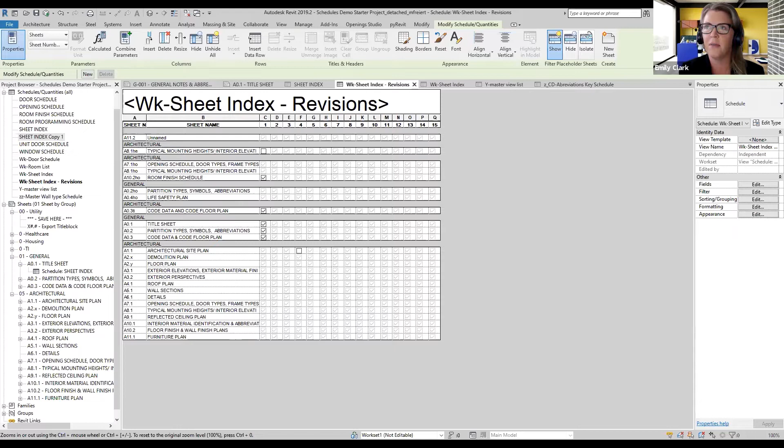I'm afraid this might have applied to something in the question and answer that was going on at the screen at the time. Jonathan asked for example about forcing uppercase on a schedule. Yes, you can - it's called the caps lock.

The two ways I can see to quickly force uppercase in a schedule would be using Dynamo to process the schedule and edit the data to force it. I believe there's a case editing thing for list processing in Dynamo, but you could also do it by exporting to Excel and re-importing the data - potentially using one of the active links where you're editing the Revit data and putting it back, or export it out and redo it.

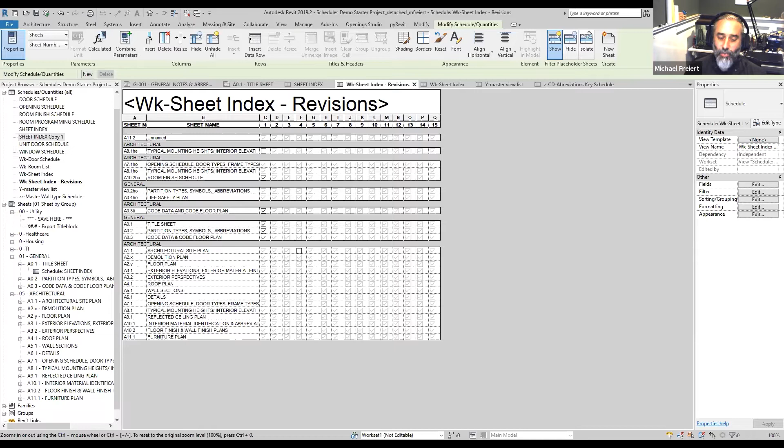You could very awkwardly, with a whole lot of really nested logic, rewrite the data in a placeholder parameter, but that's going to get really messy and probably run into the logic limits of how far Revit can go before it crashes Windows.

We have a lot of problems with families brought in from outside doing camel case, no case at all, or random case. I try to clean all those up before I put a family in our library, but I understand that's a problem - if we don't have it, they're going to go get it somewhere. It's like I said about the XYZ parameters: if you don't give them the tools, they're going to go make the tools themselves. I understand the problem there.

And someone asked something about BIMlink - we're talking strictly just inside of Revit today, not about external tools. We've mentioned a few of them that CTC has and stuff, and there's some great tools out there, but the things we were doing were just trying to stay inside of Revit.

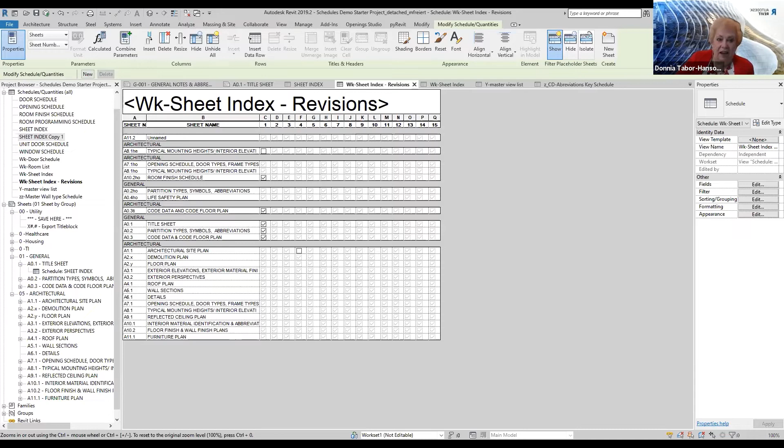Yeah, and we took up an hour doing that. I mean, we could talk for an hour just on this. CTC and ATG have great demos of their various tools, AU does too - I just watched a great session on Dynamo routes. There's a bunch of folks talking for hours about Dynamo. That's its own semester-long course.

But the core tools - a lot of them are there in Revit, and there's a lot of stuff you can really do without stepping out into other things or training your users. Most users don't want to learn Dynamo - even Dynamo Player, which is pretty straightforward, is more than a lot of users are happy to do. So if you can give them a really straightforward, accessible means to edit what they're looking for, they'll do that, as long as it stays within your ideal - I don't want to say standards, because standards and best practices are all well and good until someone actually opens a project.

That's good, I like that - that's a good one. If you can leave them ways to follow those by accident, they're much more likely to do so.